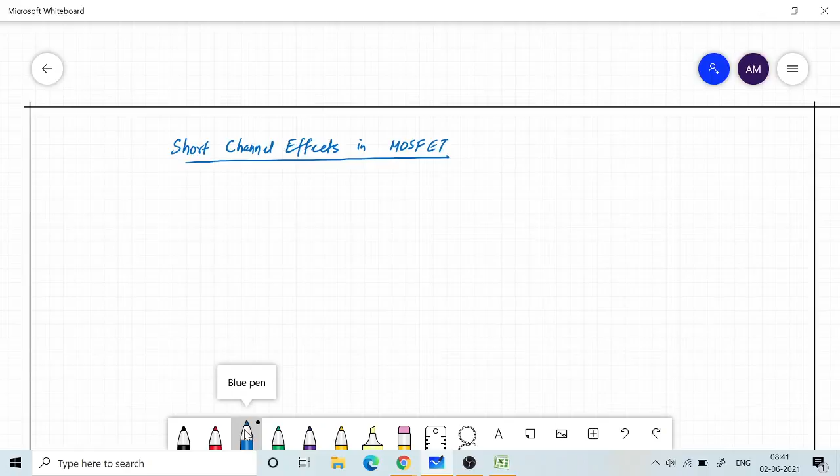So when we reduce this channel length, there are various consequences, and that is what we are going to look at. Number one, which we have already seen, is channel length modulation, that we saw in the last class. Channel length modulation. But for completeness sake, let me rewrite the expression for ID-SAT.

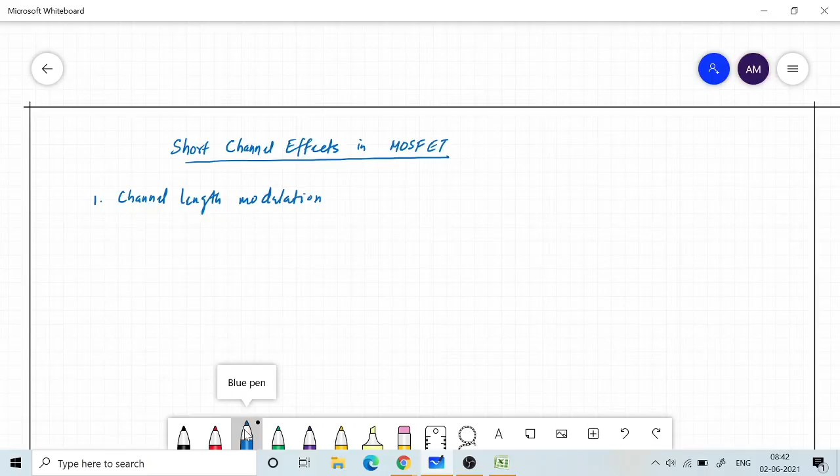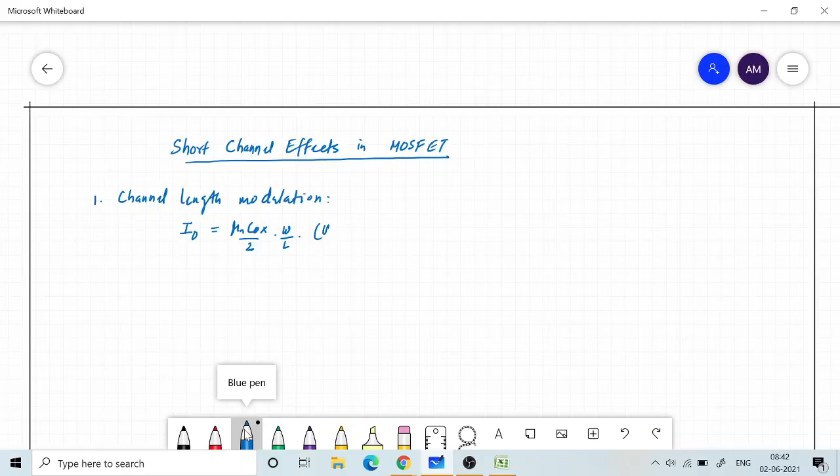Channel length modulation is more prevalent for larger values of VDS, and we have the drain current expression: ID is equal to mu n Cox, this is in saturation what I am writing, divided by 2, then W by L, times VGS minus VTH, whole square. And this was the original expression for the drain current that we derived, and then we corrected it to include what is called channel length modulation, and that term is basically 1 plus lambda VDS.

This means the saturation current also depends upon VDS. It's not completely independent of VDS. If it was completely independent of VDS, lambda would be 0. Once it saturates, there will be no more variation of the drain current. But practically what we see is that there will be small dependence, and this dependence will be more pronounced when we reduce the channel length, because we know that lambda, or lambda into VDS,

is basically delta L by L. It's a fractional change. So if L is smaller, then delta L by L is going to become more prominent. If L is very big, a small delta L change will not give rise to a larger change.

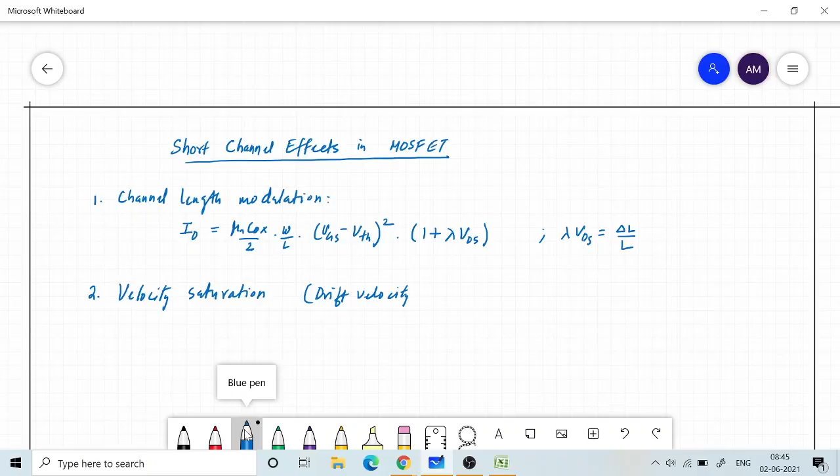Velocity saturation. Here by velocity I mean the drift velocity. Now in the derivation of MOSFET current we have used the concept of drift velocity. It was basically dx by dt, the rate of change of position of the electron with respect to time, and that depended on what? So drift velocity is given as,

so vd, that's the drift velocity, is given by the expression mu n, for electrons usually it is in the opposite direction, so minus mu n into E. So what does that mean?

The mu is a constant, so the drift velocity is going to increase in proportion to the electric field that you apply. This is always the case. Whenever a current flows through the conductor, there will be a flow of charge carriers, and the speed with which these carriers move is basically an average speed.

Drift velocity is basically giving you an average speed. If there is no collision, this charge will get accelerated in the field, and the velocity is no longer going to be constant. It will keep on increasing, like F equals ma. If you apply Newton's law, a point particle with charge in an electric field is going to accelerate as long as the force is there.

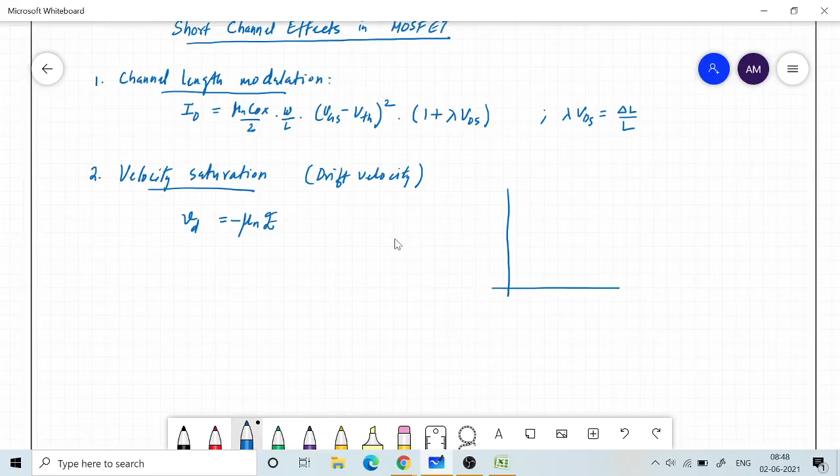So this drift velocity is proportional to electric field, usually. But as the electric field increases and increases, if I draw a graph plotting the electric field magnitude versus the drift velocity, as per this equation, it has to be a constant slope like this. As we increase the electric field, the drift velocity should also increase. But in practice, this linearity will not continue beyond a certain value of electric field.

So there is a particular value of electric field, we can call it some kind of critical field, beyond which it will not increase as expected. There will be a saturation, and the value or magnitude of the drift velocity saturates at some point. Beyond EC, if you increase the magnitude of electric field, the drift velocity will not increase. So this I will call VD sat, that means it's a small v, which is velocity, drift velocity, saturation value.

So this relation is not valid beyond this point. It is valid only for E less than EC. But for beyond EC, it is going to be VD sat. When E is greater than or equal to EC, it is going to be saturated, that means it remains constant. So this is what we mean by the phenomena of velocity saturation.

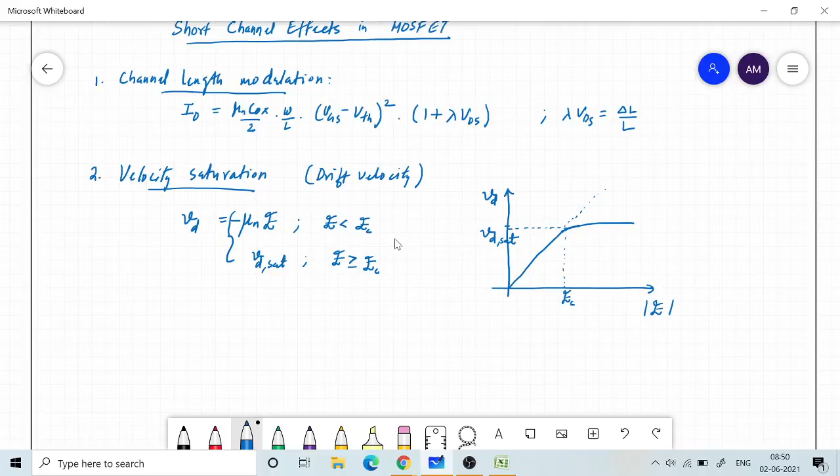Now what is the consequence of this in the case of a MOSFET? MOSFET current is due to the flow of electrons. If we are considering an N MOSFET, the flow of electrons results in the drain current, and we have derived the expression for when VDS is less than VGS minus VTH, that means it's working before saturation, then our IDS was what?

It was mu n C ox W by L, VDS into VGS minus VTH minus VDS by 2. So this was our expression. You can take VDS inside and then it will be VGS minus VTH into VDS minus VDS square by 2. That is another way of writing it. But whatever it be, this was the expression that we derived for the current before saturation is reached.

And if you want to include the effect of channel length modulation, you can also multiply it with this factor, though it is not very significant for smaller values of VDS, but still you can put it in. The effect contributed by the last bracket may be very negligible for smaller values of VDS, this may be closer to 1. So this was our expression for the linear region or quadratic region, and this expression is valid.

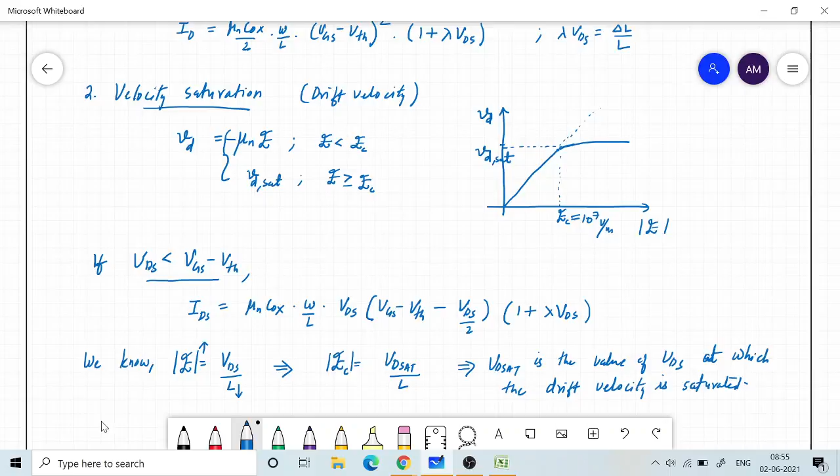And suppose this electric field, just as an example, is equal to 10 raised to 7 volts per meter, if EC is that, then for a 100 nanometer length MOSFET, when you apply 1 volt, you will reach saturation, beyond which the speed will not increase. So what is the consequence of the current? The current will be saturated.

So therefore the ID SAT, the drain current due to velocity saturation, is going to be mu n C ox W by L, VD SAT. I am replacing VDS with VD SAT. What is VD SAT? The value of VDS at which drift velocity is going to be saturated.

So if you apply even larger VDS, there is going to be no change in the current, because the speed of the electron is no longer going to increase. So it will be the same whenever VDS is going to be larger than VD SAT.

Okay, so it is going to be VGS minus VTH minus VD SAT again by 2, into, but in this expression it will still be lambda VDS. Because this is actually coming from delta L by L, which is equal to lambda VDS.

Okay, so that is not related to VD SAT. The extension of the depletion region width, which we learned in the last class, depends upon the actual value of VDS. It is not going to depend upon the VD SAT.

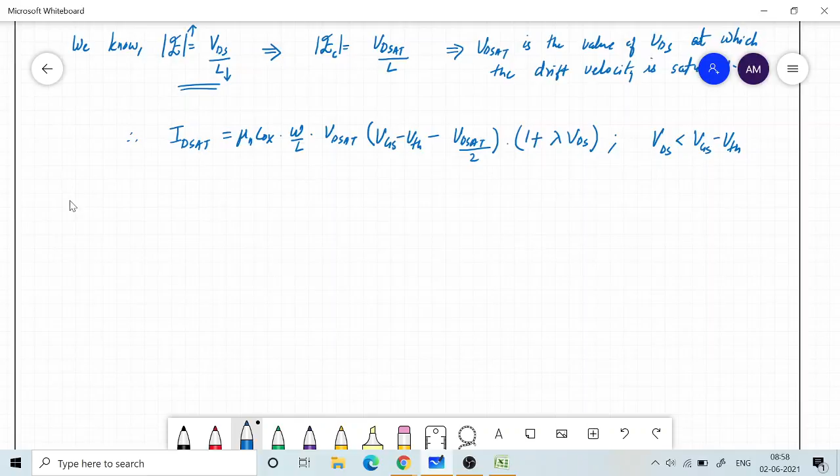So let's draw it and see how it looks. I am drawing VDS here, and this is my ID. Let's take two different cases. One case you have a very small VGS value, and if you have a small VGS value, it will saturate like this. So this is going to be the point at which it is going to saturate. Before that it is this, and we can write it basically as VGS minus VTH.

VGS1. So this curve corresponds to some VGS, which I call VGS1, which is a smaller VGS.

So it saturates, suppose my VD sat is here. This is where my velocity is going to get saturated, and it corresponds to some voltage. So for this VGS1, saturation has already happened even before VDS reached VD sat. So VD sat is not playing any role here, because VGS1 minus VTH is the point at which saturation happens, and when VDS crossed there, saturation already happened.

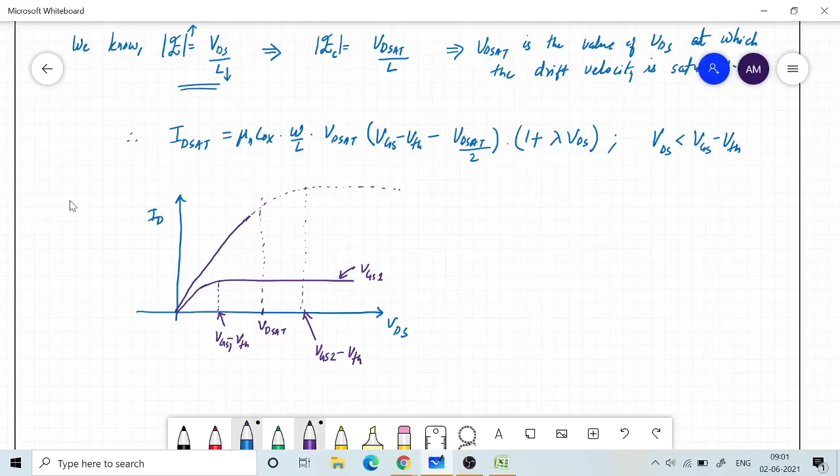And what is this point? This is the point where VDS equals VGS2 minus VTH. Note VGS2 is much greater than VGS1, as you can see the difference here. So the saturation should happen from here onwards, but then there is a VD sat.

Before VDS becomes equal to VGS2 minus VTH, there is a point at which VDS becomes equal to VD sat, and once you reach there, the velocity saturates, and therefore the current already saturates here. So this is the way in which saturation is going to happen. It cannot increase, it will be saturated.

Let me draw it more properly. So instead of saturating at this later point, it has saturated early, because your VD sat was here. At this point, when you applied VD sat, your electric field reached the critical electric field, and therefore your drift velocity saturated. Once the drift velocity is saturated, you cannot have any further increase in current with respect to VDS. That is why we are using this expression.

Now we have a new expression for current, taking into account the velocity saturation phenomenon. Earlier we had two expressions, one corresponding to the saturation current, the other corresponding to the drain current before saturation. Now, in addition, we have another current. So we need to combine all of this into one equation for ease of writing.

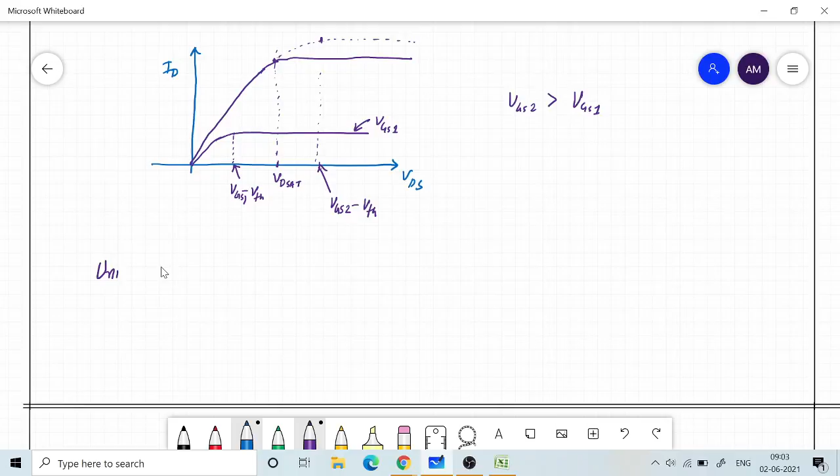So we have what is called a unified current model. This means that the ID current is going to be written as one equation, valid for all values of VDS. So we don't need to write separate equations for velocity saturation, the normal saturation when VDS becomes greater than VGS minus VTH, and when VGS minus VTH is smaller than VD sat.

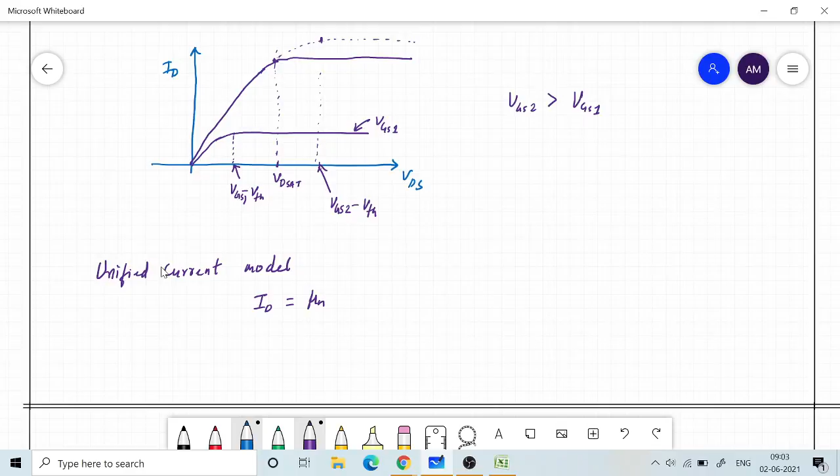So there are basically three ranges. If I consider the top curve, there is a range between this, then a range here, and a range here. Depending upon whether your VD sat is after VGS minus VTH or before that, you have to pick up the right equation.

So instead of writing different equations for different conditions, let's try to combine all this into one equation. It's basically given as mu n C ox, and then W by L. I'm going to write it in a slightly different way: I'll write Kn dash, so that I can introduce that also.

Kn dash, W by L, and then V min — I'll explain. V min into VGS minus VTH into V min, minus V min by 2, multiplying 1 plus lambda VDS. So this is my unified current equation, where I need to now define what V min is.

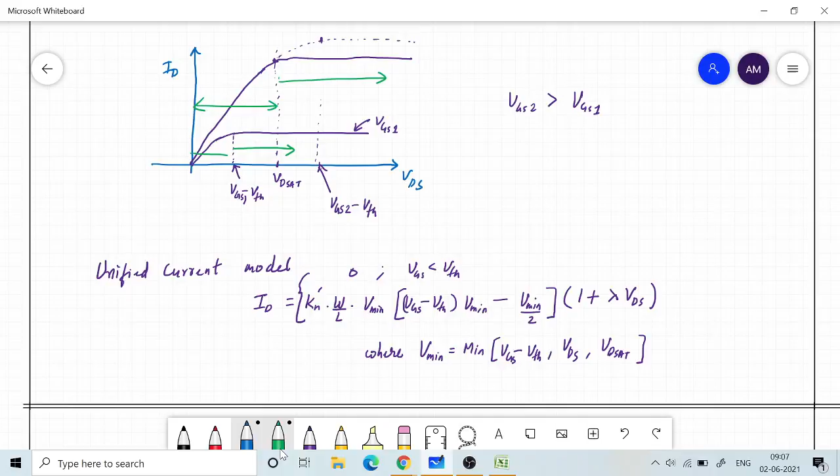So depending upon the value, here we have a different equation, similarly here we have a separate equation. So different curves here will have different expressions.

So for the bottom curve, for VGS1, we need to consider VDS, this one and this one. This is for the bottom curve, but for the top curve, we need to consider VDS, this and this. So these are for VGS2, and this one is for VGS1, whatever I have ticked.

So whatever is relevant will be taken according to the minimum of these three. That will be put in the expression as V min, and now I also need to explain what is Kn dash, which I did not introduce earlier.

So Kn dash, as you can see by comparing with the earlier equation, is basically mu n C ox. And what is C ox? C ox is basically epsilon ox, that means the permittivity of oxide, divided by T ox, and we consider it as one parameter, and this is also one of the SPICE directives.

I asked you to put say Kn and Kp correspondingly for PMOSFET, so you can put in the values, and this is generally a process parameter, or you can say the technology parameter.

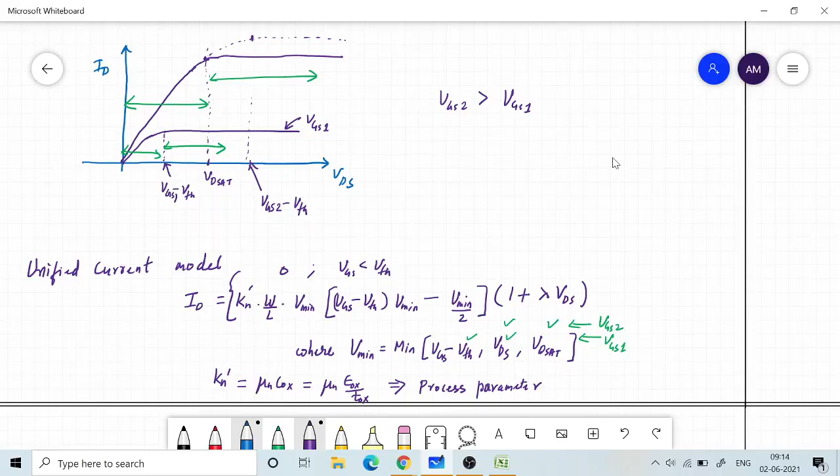So this is basically our second short channel effect. And what is it? It's called velocity saturation. Saturation can happen in two different ways. One way is that VDS becomes greater than VGS minus VTH, meaning pinch off happens - saturation due to pinch off. The other is saturation due to velocity saturation, which is because your electric field has become very large, reaching the critical field where the drift velocity can no longer increase further.

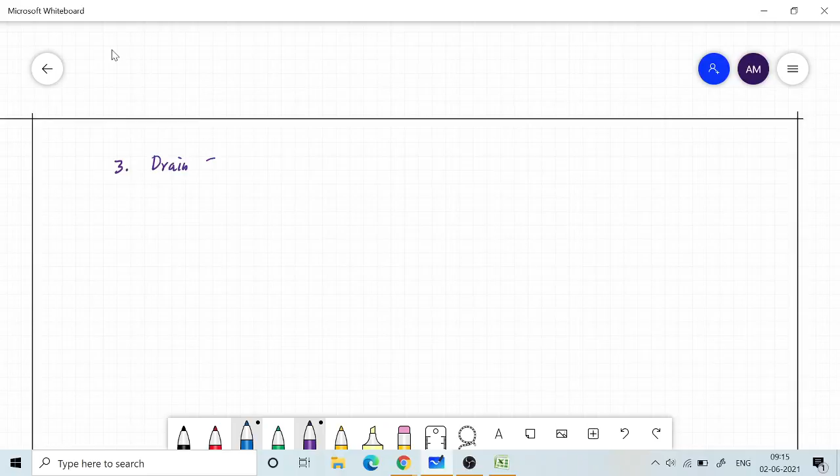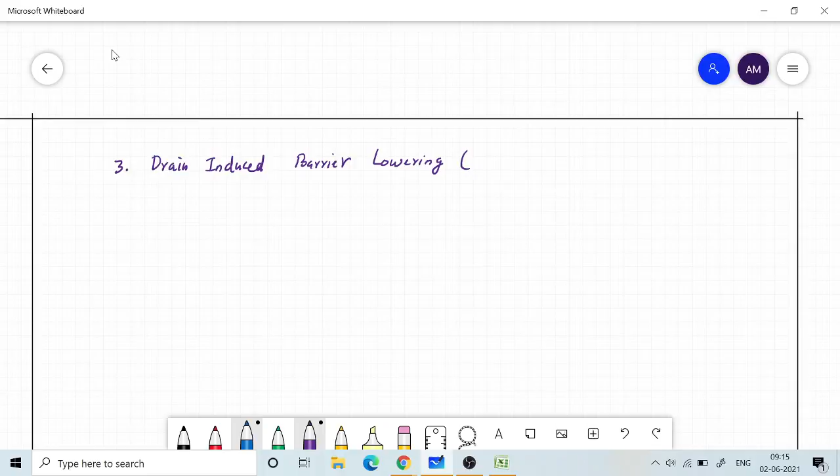Next we'll go to the third short channel effect, and the third short channel effect is called drain induced barrier lowering, and people in the VLSI field will refer to it as DIBL. It's just the short form of drain induced barrier lowering. So when you hear DIBL, you know they are talking about drain induced barrier lowering.

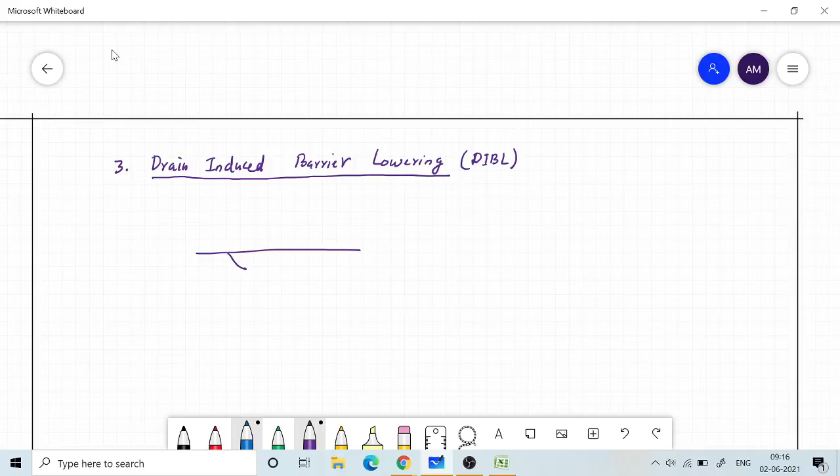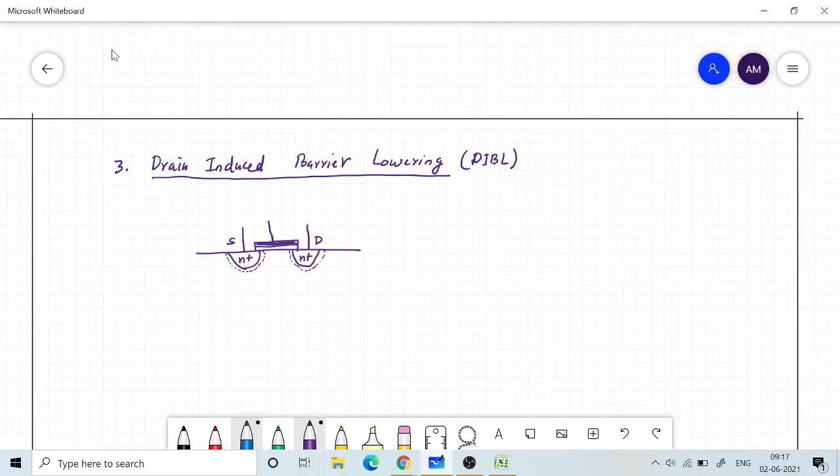What is it? To understand this, we need to draw some schematics. If you go back into the schematics, there's an N plus region here, and this is also one of the short channel effects. I'll draw it such that you see the channel length is very small, and there will be a depletion region extending on both sides - this is source, this is drain, and then you have oxide and metal, which I'll draw shaded as the gate. When there is no voltage applied, there is a depletion region extending into the P substrate. This is an N channel MOSFET, and as you apply VGS and VDS, we know what happens.

VGS will decide whether an inversion layer is created, and VDS will increase the depletion region width. As you increase VDS, it's like reverse biasing a junction, and the depletion region is further increased - this is how it will look. Now if VDS is large and the depletion region width is increasing, it will mainly increase into the P substrate region, not into the N plus region much, because N plus has about 2 orders of magnitude higher doping there. Wherever the doping concentration is less is where the depletion region extends, and this will effectively reduce the length of the channel.

This reduction is very significant for low length, or smaller length, MOSFETs. Earlier it was like this, and it has almost become half. So to invert this channel, if you apply the gate voltage, you don't need to apply the same amount of threshold voltage as before, because you don't need to invert the entire region from source to drain - you only need to invert this smaller region. If you want to invert a smaller region, you require only a smaller amount of electrons coming up there, and in a way you can say your threshold voltage will be reduced by it.

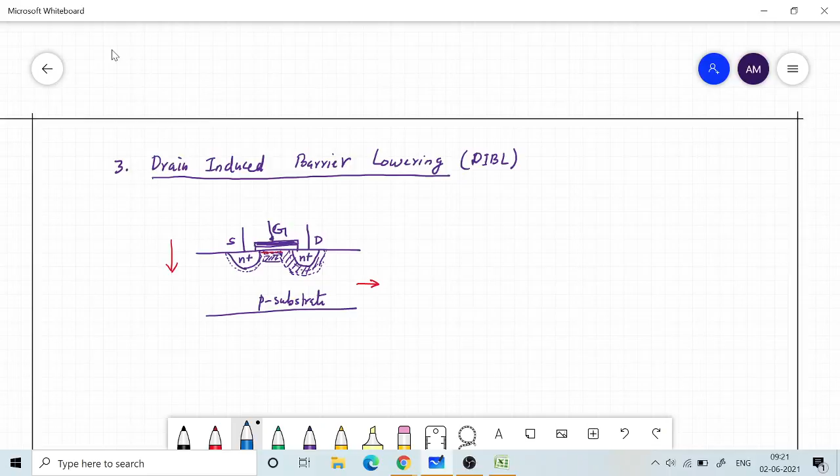So if you go from left to right, you have an N plus region. Okay, so there is an N plus region, then there is a P region, and then there is an N plus region. Now the first thing to draw is the case where VDS is 0. Okay, so VDS is 0, your Fermi level is going to be continuous. Means when there is no voltage applied, your EF is going to be the same. Now N plus means the Fermi level is going to be very close to the...

So this is our Fermi level, and it is going to be very close in the N plus region. It is going to be very close to the EC, right? Then this is my EC. So EC is going to be very near - so this is EC on the N plus region, whereas the Fermi level is going to be more near to the EV. So this is my EV in the P substrate, and then I will have EI and I will have EC.

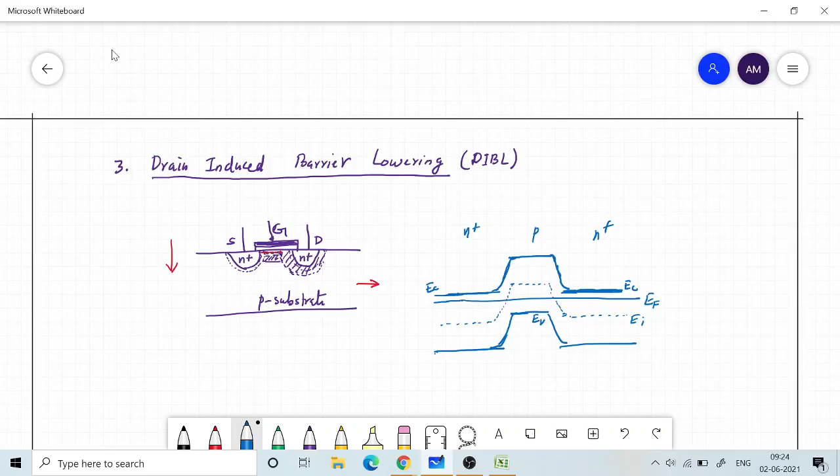Okay, so now I can join it. So this is the depletion region 1, that is source to bulk, or source to the semiconductor, N plus to P, and then back from like this. And this is my intrinsic level, how it is changing, and then finally it will look like this. Okay, so roughly it is like this. So this is my EV in the N plus region, this is also EV in the source region, so this is the drain region, and this is how it will look like when we do not apply any VDS.

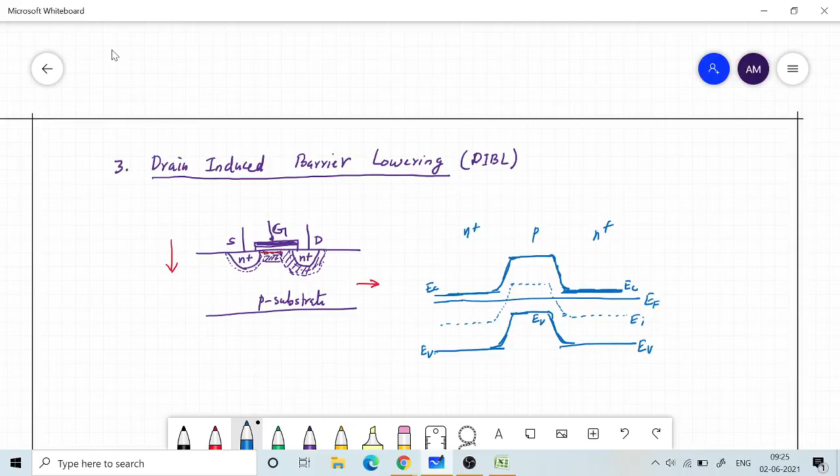Okay, the moment we form this N plus region on the P substrate, it will look like this. Okay, so you can see that this N plus region, its majority carriers are electrons, because your Fermi level is close to the conduction band. Okay, and here the Fermi level is close to the valence band, so it is P type. Again, on the drain side also, because of the N plus region, the Fermi level is close to the conduction band.

Okay, now on top of this, if I apply the potential, I said earlier the depletion region width will increase. So how can you show that? Okay, in order to do that, let me redraw the energy band diagram.

In the case when you apply VDS, what is the consequence? One thing you know is that this Fermi level cannot be continuous. It will be shifted between the two regions by an amount equal to the applied voltage.

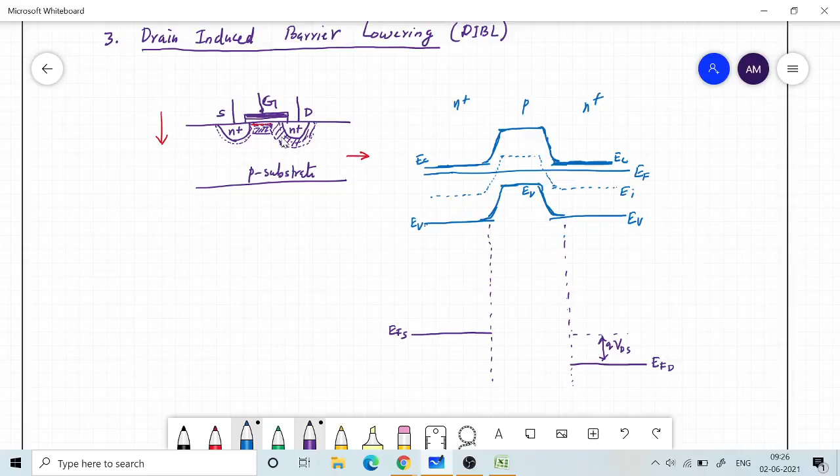If you apply a positive voltage on the drain, since we are drawing the electron energy band diagram, your EF is going to go down. So this is EF on the drain side, and it will go down corresponding to the EF on the source side. This difference is basically Q into the voltage VDS. So if you apply positive voltage, it will go down on the drain side, because Q is negative for electron.

What about the other regions? They are still N plus, P, and N plus. So if you redraw, your EC is still here, your EC is going to be here. So this is your EC on the drain side, EV on the drain side, and then somewhere in the middle you have your EI of the drain side.

Similarly, this is your EC on the source side, and this is your EV on the source side. Somewhere in the middle you will have your EI on the source side.

Now what is more important is to draw how it looks in the middle. As before, on the source side there will be no much change, it just goes up as before. But then on this side, the depletion region is going to extend. Earlier the depletion region was on the right side, this much, and it was more or less the same as on the left side.

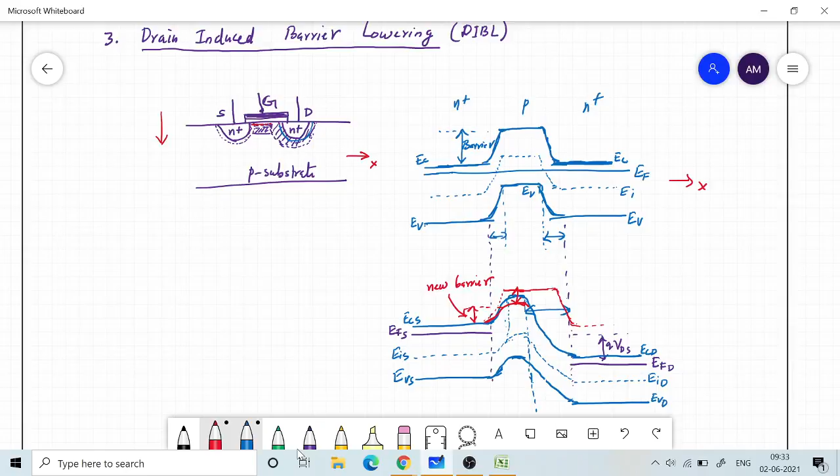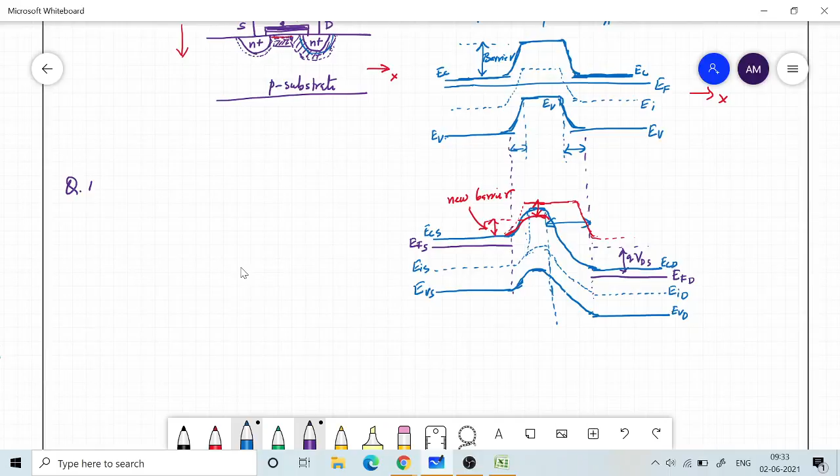So now the question is this: if this is what is happening, then what is going to be my threshold voltage? That is a question we need to answer. What is the new threshold voltage?

What was the earlier threshold voltage? We will denote that as VTH0. Let us write it as VTH. So earlier the threshold voltage was VTH0 plus—you remember this gamma we talked about in the last class, due to body biasing.

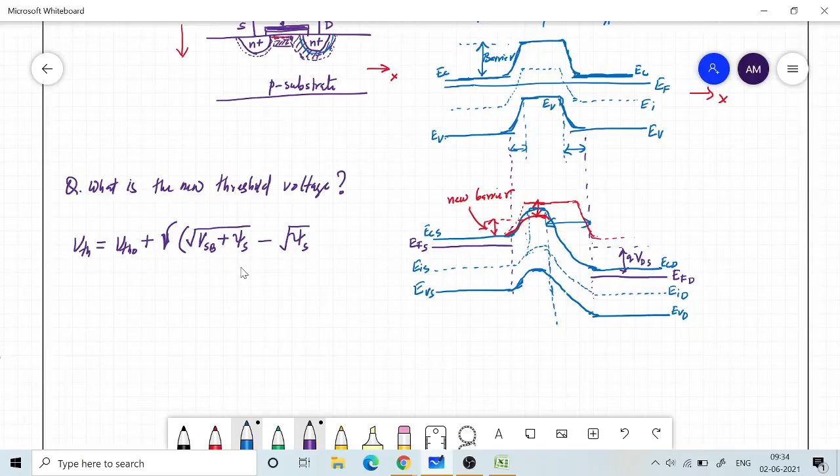There will be a correction. VTH0 is the threshold voltage without body biasing, but if there is body biasing, then we need to take that into account. So if there is a source voltage with respect to the bulk, we need to add that to your psi_s, and then subtract psi_s, where psi_s is 2*phi_b. This is what we have seen earlier.

Now this will be further modified because of DIBL, or drain induced barrier lowering. How much we need to modify this, we need to look at. In order to see that, we will do one thing: the consequence of drain induced barrier lowering upon the threshold voltage is actually found out by measurement.

We apply VDS at two different values. One is a small VDS value. Let's say VDD, that is the power supply voltage. In digital circuits we have a 0 voltage and VDD, corresponding to low and high states. So let VDD be the power supply high state voltage.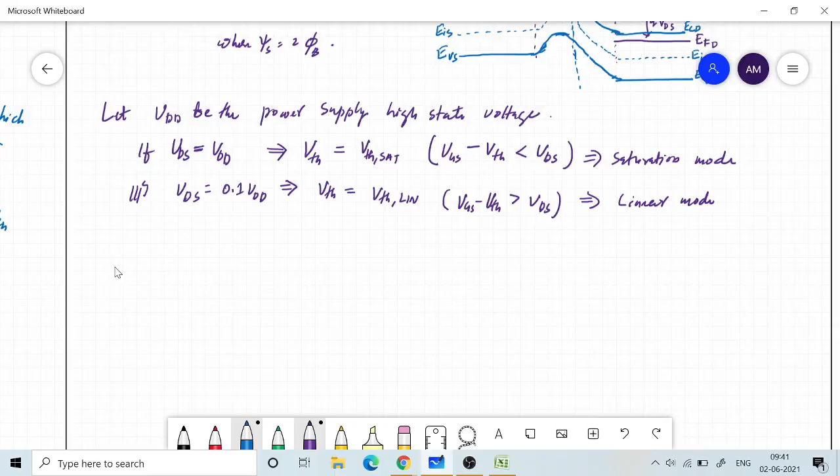Definitely when you apply large VDS, it should be smaller by the logic I said, because we only need to invert a smaller region due to the lowering of the barrier. In other words, from the energy barrier point of view, when you apply the gate voltage, you are basically pushing down this region.

All the bands here you are pushing down by applying VGS. So VGS will push everything down, because positive VGS means this region will be pushed down. Now if you want to push it further such that electrons can easily flow from one side to the other, so that this region will also become n-type, you push further keeping EF constant. You can push it down by only applying VGS and make it n-type, and thereby invert the channel.

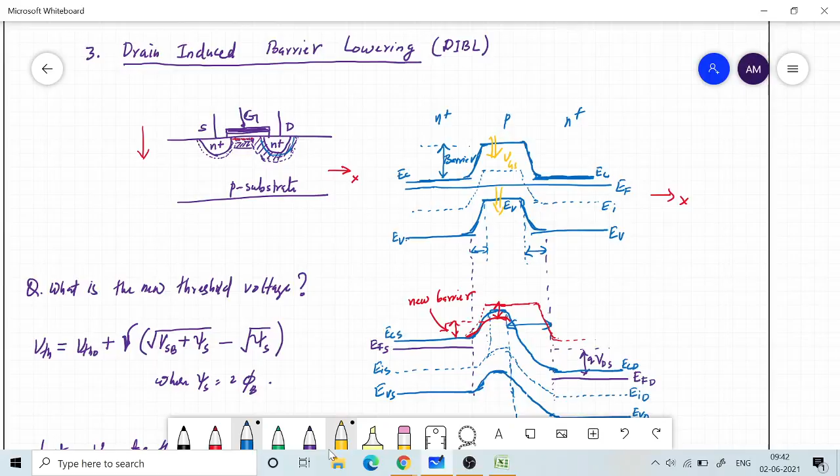So that is basically the way in which the threshold voltage is defined: how much you need to push it down such that it will become an n-type material in the middle region. So if it has to be made n-type material, how much do we need to push? How much voltage do you need to apply in order to achieve that?

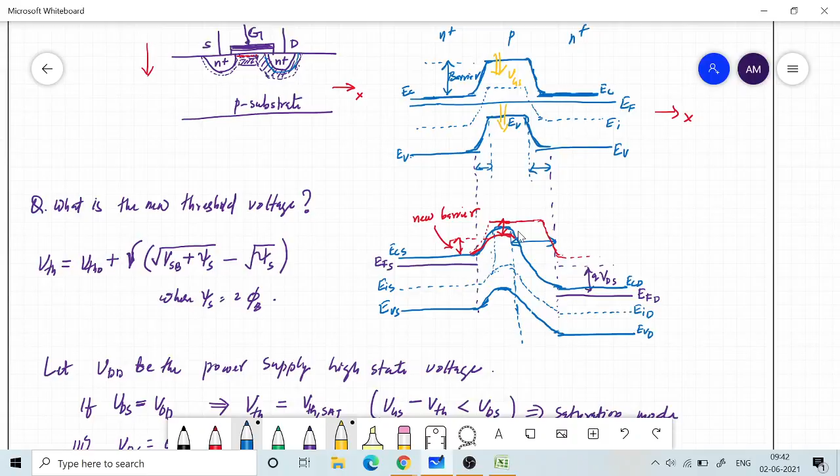But if already the barrier has gone down, we don't need to push that much as before. We only need to push a little bit more. The present new barrier, that much only we need to push down in order to make it n-type. So our VTH will reduce when we have a large value of VDS.

So we will define a parameter, the DIBL parameter. Therefore, the DIBL parameter you will define as, say, eta. So that is going to be equal to...

VTH linear, this is going to be larger, minus VTH saturation, this is going to be smaller, because we don't need to push down much since the barrier is reduced, divided by the difference in the VDS values. So VDD minus, say in this case we have taken 0.1 VDD. Whatever VDD you take, you can say that is a very small VDD.

Okay, so this is a parameter that we will find out by experiment. So what is the experiment you need to do? After fabricating the device, you apply VDS equal to VDD, find the characteristics, and find out the threshold voltage.

So that is one threshold. Then we apply smaller VDS and again repeat and measure the threshold voltage again. So they will be different by some amount. If they are the same, then DIBL effect is not there. If they are different, definitely there is barrier lowering. That's what we mean by that.

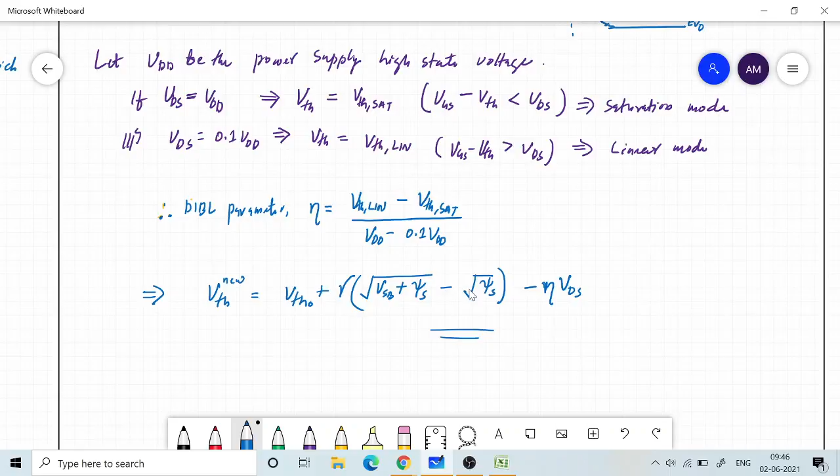So this is also a short channel effect, because for long channel, basically the width or the length of this region, this is our length, right? Length of the channel.

So this will be very far away, and thereby some fraction of this same amount of depletion region encroachment will not make much effect if L is very large and this is only like 1/100th of the length. But if it is like 1/10th or 1/5th of the entire length, this is going to be very significant.

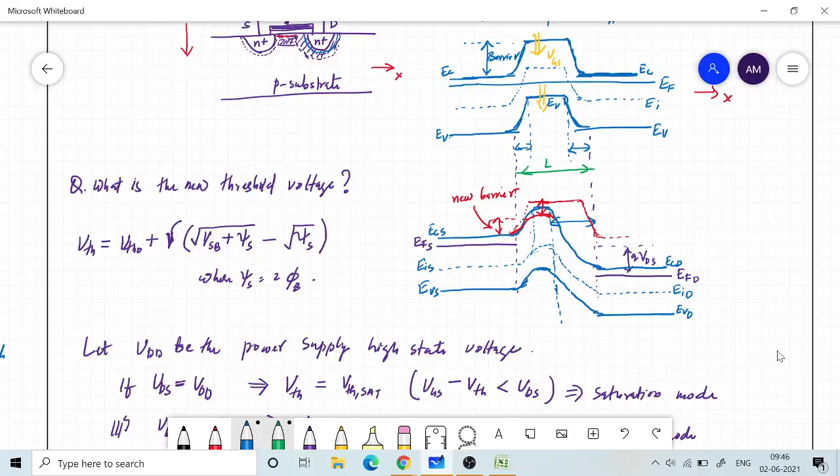Now how do we overcome this phenomena, because it is not a good thing to have this effect? We need to do something to avoid it. So to overcome DIBL effect, we can introduce a certain change. What is the change? We can introduce a P plus region near the N plus region. The idea is to reduce the length by which the depletion region extends into the channel region.

If it is a P plus material, so if you have a PN junction, you have N plus region here, earlier it was P region here. If you think of it as a diode and you are reverse biasing it like this, then since it is N plus, the depletion region will be much less extended into the N plus region, but it will extend a lot more into the P region, because in the P region the carriers are very scarcely populated. The density is very less, whereas here you have very, very high density. So everything can be obtained with a smaller length.

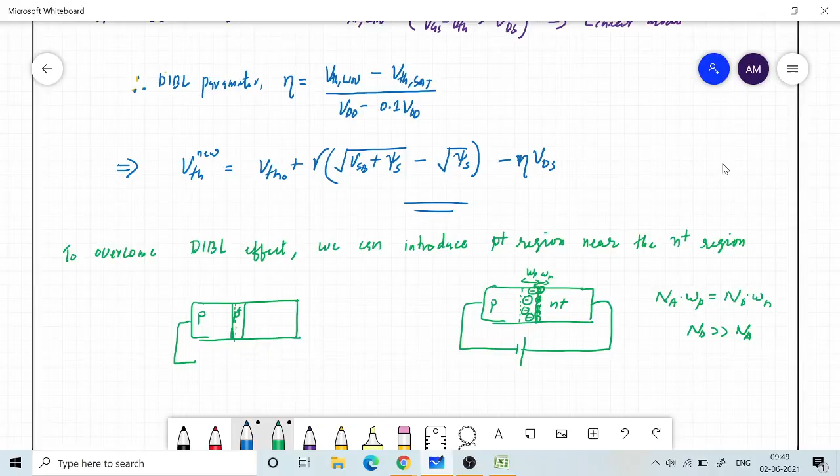So to overcome this effect, this is our P side, but near to it we will introduce a third region, which is basically P plus region. So it is a P plus and N plus region. And if you now reverse bias by the same amount, the picture will be much different. There is going to be a depletion region here, but it will be very, very small, and this side also it will be very, very small.

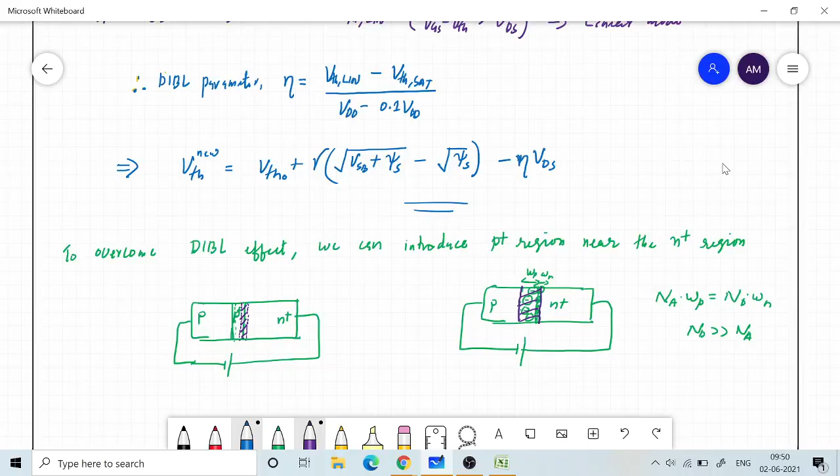So thereby the depletion region is only extending this much. It will not extend because we are introducing a P plus region there, whereas here the depletion region has extended so much. So by introducing a P plus region, we can reduce the depletion region extension into the channel region. So the channel length is effectively not much affected by it, and therefore the barrier will also not be reduced.

Thus the barrier reduction is reduced as the extension of the depletion region into the channel is now minimized.

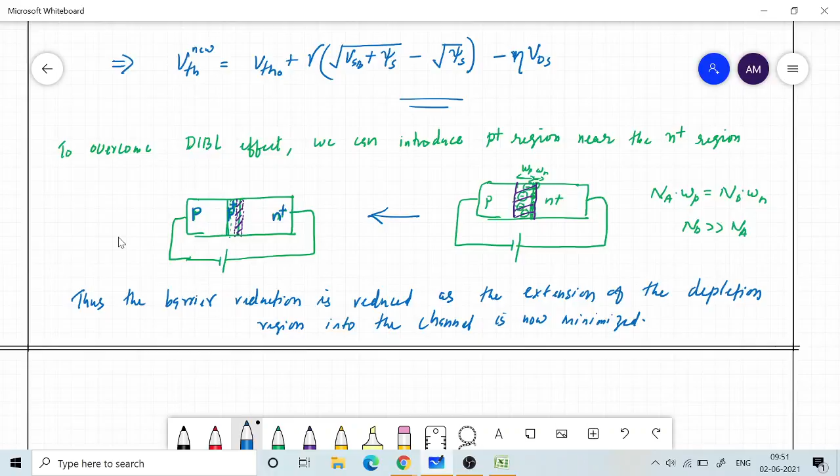So we are proposing this: introduce a P plus region. So P is there, P plus is there, and N plus is there. Earlier it was only P and N plus. This is done on both sides, both source and drain side, in order to keep the device symmetric. I told you in an earlier class that you can use any of the terminals as drain or source, because MOSFET is constructed as a symmetric device.

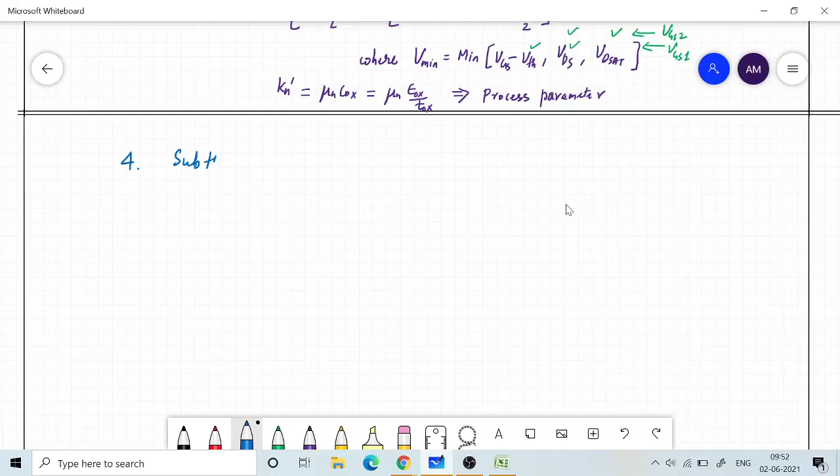So that is about the other effect, that is DIBL effect. Now let's go to the next effect, the fourth short channel effect. This is called sub-threshold leakage.

Now, by the term sub-threshold, you should immediately understand that VGS is less than VTH. Or to be more precise, VGS is between VTH and 0. So what is going to happen if we keep VGS less than VTH but greater than 0? Sub means smaller than threshold, just like we say sub-micrometer, meaning lengths smaller than 1 micrometer, like say 100 nanometer. So here sub-threshold means VGS is less than VTH.

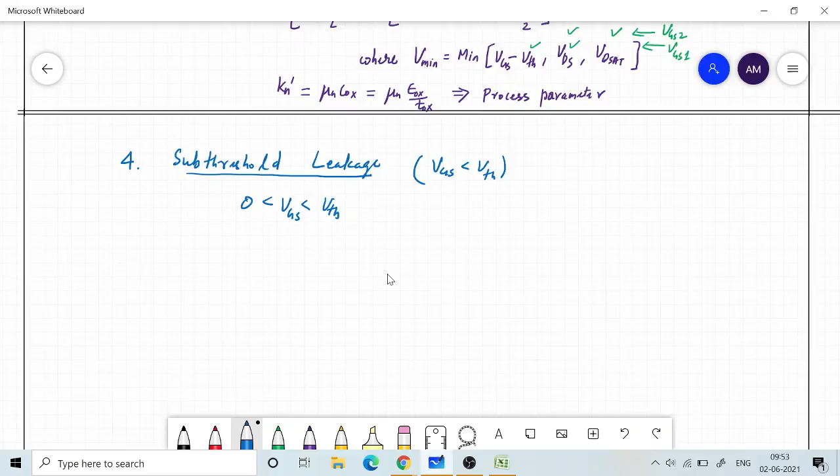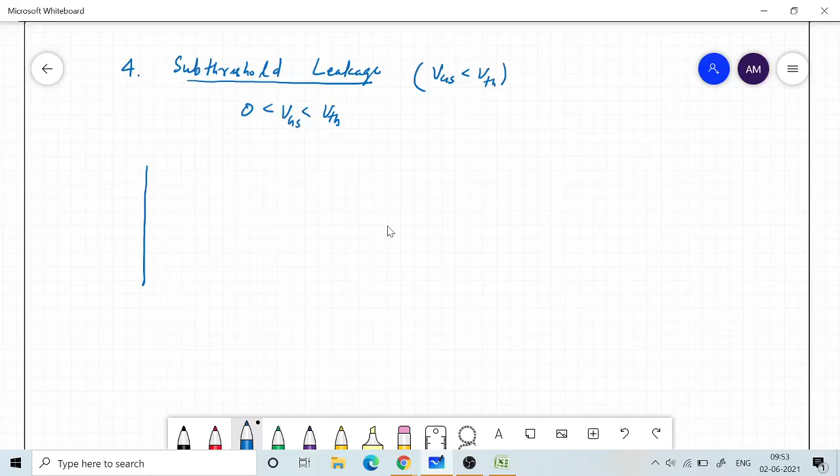So what is going to happen if this is the case? We need to look at the picture inside the device. So we know that if you simply draw the transfer characteristics, we did that earlier, that is VGS versus ID, and by using the SPICE directive, we have been able to fix our threshold voltage.

So threshold voltage is somewhere here, say 0.8 or something like that, and this is in microampere. We are looking at this drain current. So we got an expression something which looked like this.

Now in our case we kept the device in saturation, and therefore we got a curve which looks like a parabola. This is because when we did the experiment, we kept our VDS equal to VGS. So as you increased VGS, you also increased VDS.

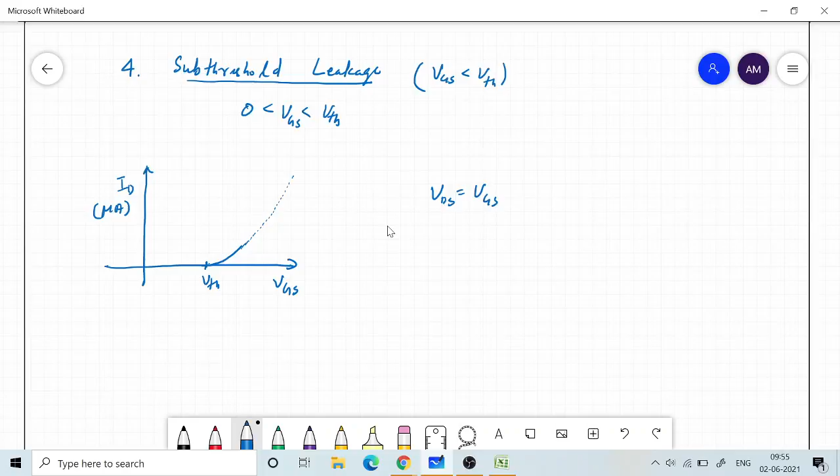Alternatively, if we do it this way, we get a parabola because we ensure the device is functioning in the saturation region, and therefore current ID is basically mu n Cox W by L, divided by 2, into VGS minus VTH the whole square. So this is what we will get, neglecting all the short channel effects.

But if VDS was kept constant, using a second power supply with a fixed voltage, say 3 volts, and you varied VGS from 0 to say 5 volts, initially the device is in saturation mode and traces this parabola path. Then after some time, VGS is increased such that VGS minus VTH becomes larger than VDS.

For example, if VDS is 3 volts and VTH is 0.8 volt, when VGS is equal to 3.8 volt or greater, VGS minus VTH is going to be larger than VDS. This means linear region.

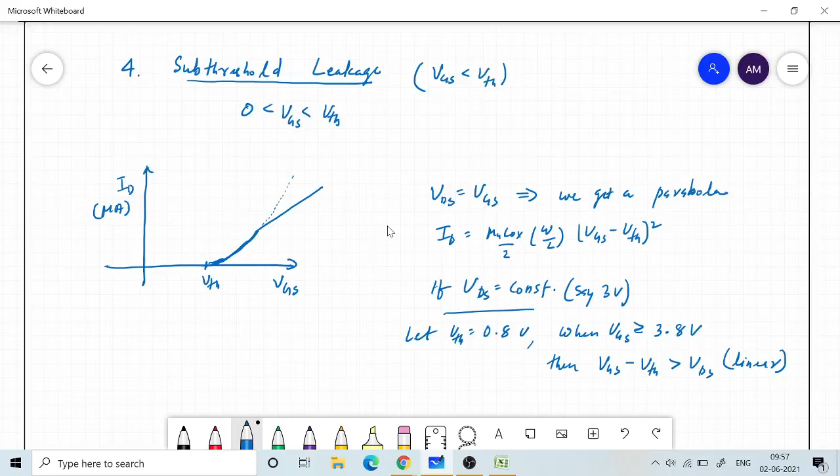And if it is linear region, the current is not going to be a parabola like this. It is going to look like a straight line. So this is the way you will get the characteristics.

You have not done this, but you can check it: if you keep VDS constant, at some value of VGS, say 3.8 volt, which is basically VDS plus VTH, you will have a change in the shape of the characteristics. From being a parabolic relationship, it will turn to a linear relationship, because it goes from the saturation current equation to the linear equation. It may be a smooth, gradual transition rather than abrupt, but still there will be a variation you can observe when you do the experiment.

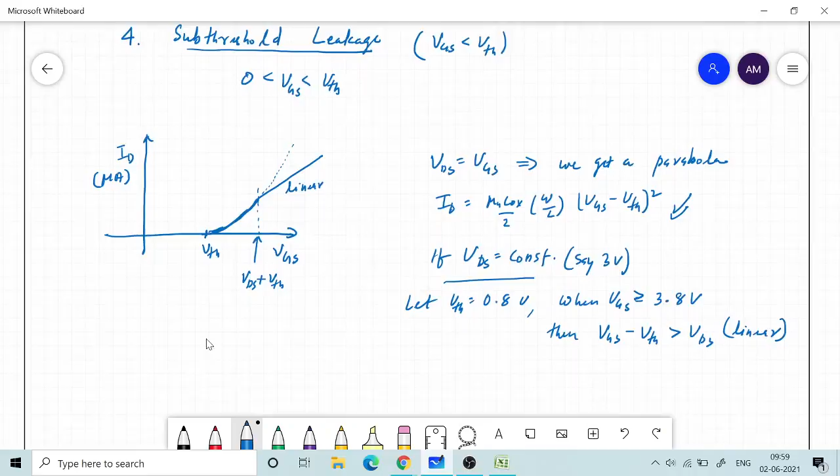So the point is that if you plot the characteristics on a linear scale - here I have taken a linear scale - the current is plotted in linear scale, and you have an option to do logarithmic scale also.

Now if I draw the same characteristics not in a linear scale, but on a logarithmic scale, all I'm going to do is take a logarithmic sheet and plot the same thing. So this is again VGS on the x-axis, but now on the y-axis we plot log of ID, logarithm to the base 10. And what we see is going to be entirely different.

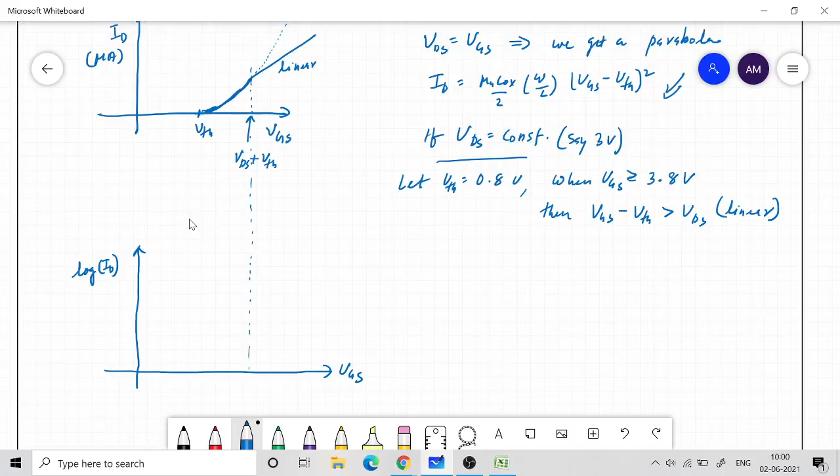If I look at this, these are some critical points: one is VTH, and the other is where it goes to linear. What you observe is a straight line here, and then it bends like a saturation curve, and then it further bends, maybe more gradually. So this is what we are going to see, and this is our VTH. The only difference is that I am using a logarithmic plot instead of the same characteristics.

Earlier it looked like zero current, but now you will see that it is no longer zero current, and you can even extend this further to the left. So this region, between 0 and VTH, is not having zero current - VTH may be 0.8, so from 0 to VTH, if you look, there is going to be current like this in the logarithmic scale.

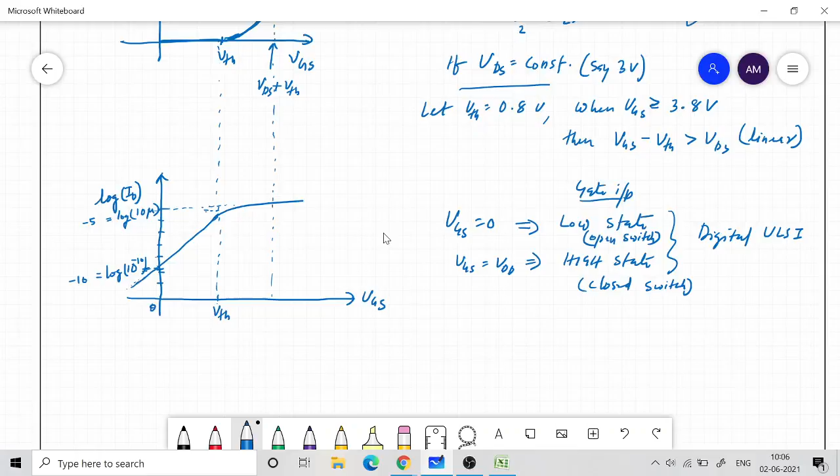It could be a different current also, maybe 1 milli also, but what is more interesting for us right now, in sub-threshold operation, that is when VGS is equal to 0, we don't have a zero current, we have a finite current which is just 5 orders of magnitude smaller than the actual current. So that current is what we call sub-threshold leakage current. So point number 4 is basically sub-threshold leakage.

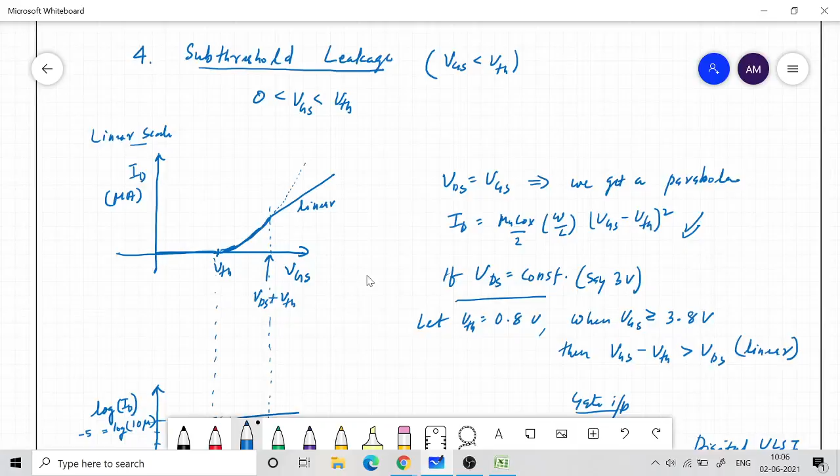So what is sub-threshold leakage current? Sub-threshold leakage current is the magnitude of drain current when VGS is equal to 0, and ideally this should be as small as possible, but practically this is never 0. So how small it can be, that is what we are interested in looking at.

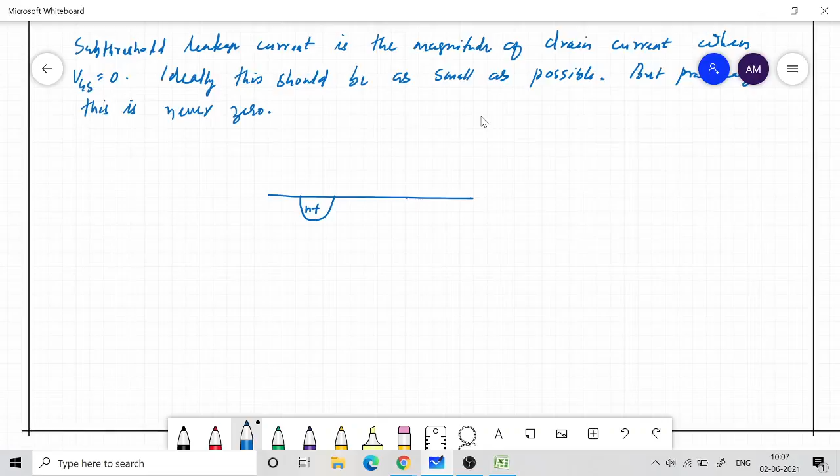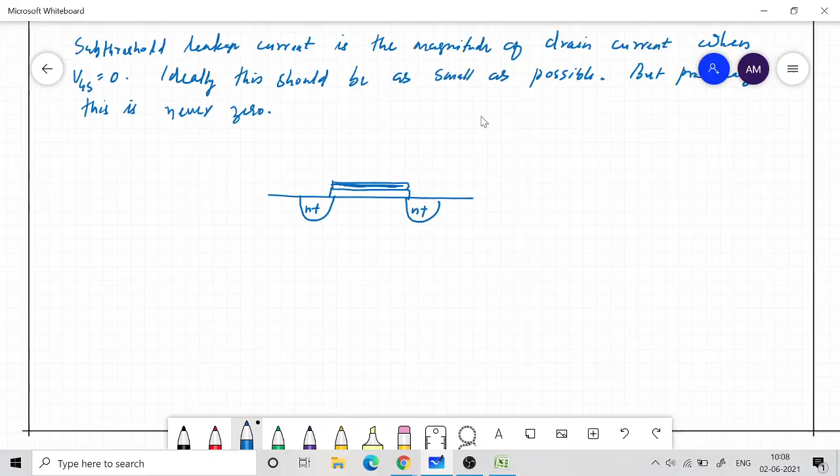So in order to find that out, we need to go into the details of sub-threshold operation. Let me again draw the schematic. So you have n plus here, another n plus here, and we are looking at a case where we give the gate voltage small. So VGS less than VTH.

This is the situation we are considering, and if you look at the number of carriers inside, they are not much, right? It's not going to be much, it's going to be very, very small. Only when you reach VTH, it's going to be significant. But less than VTH, the concentration of these electrons - the inversion layer has not been created. So there is a weak inversion, probably you can say. So that will have some effect.

So this is basically the point x equal to 0, and this is basically x equal to L. So if you look at the concentration of electrons, we need to apply a VDS also here, then only the current can flow. So we are going to look at the case where VDS is there, and the device is supposed to be off when VGS is less than VTH, but it is not really off. That's what we are saying.

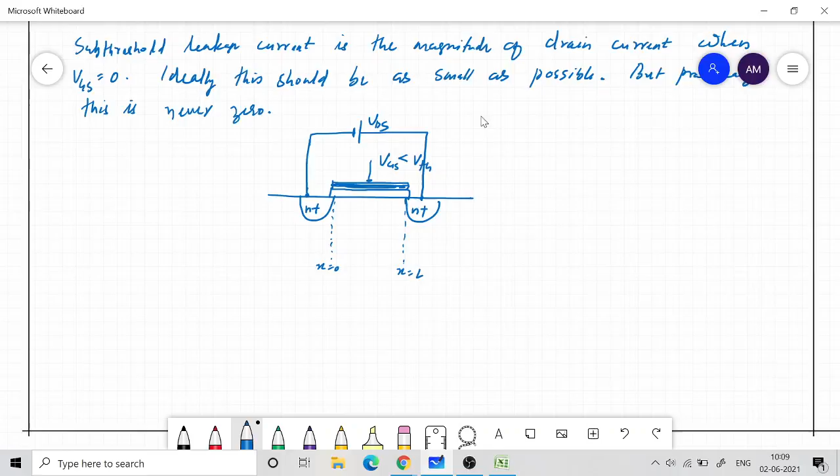There is some current which is still flowing even when strong inversion is not happening. So when we operate in the sub-threshold region, in order to see that, we need to look at

the variation of the concentration from 0 to L. Okay, this is my x. So if you look at

if VDS is very large, there will be pinch off happening also, so you will have variation of the concentration like this. That is, this side we have large concentration, and then to that side it will go to 0, because wherever

the depletion region begins, you will have 0 concentration. That is why we call it the depletion region, so there is a depletion region here also, which I am not highlighting much because we are looking at another parameter here. So wherever the depletion region starts, you will have zero concentration, but there will be a concentration

on the source side relatively larger, and this concentration I will call the concentration of electrons in the p region as NP of 0, corresponding to x equal to 0, and then it reduces to 0. So here I can say that it is NP of L, which is 0. So you can see that there is a change in the concentration from left to right.

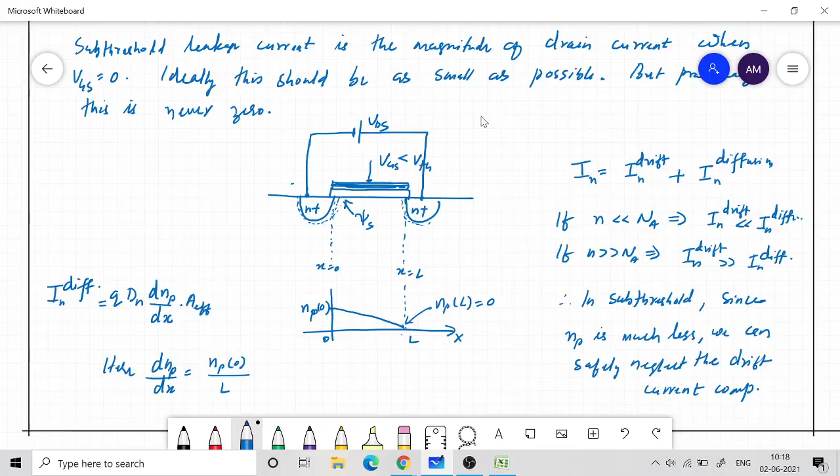The direction of current is from right to left, because VDS positive voltage is connected to the drain, and negative voltage is connected to the source. So this is the source and this is the drain, and the current is going to be in this direction. Let's work out the magnitude of this current. Electrons flow from left to right, but current is in the opposite direction because electrons are negative charge carriers. So we will substitute this back into the equation.

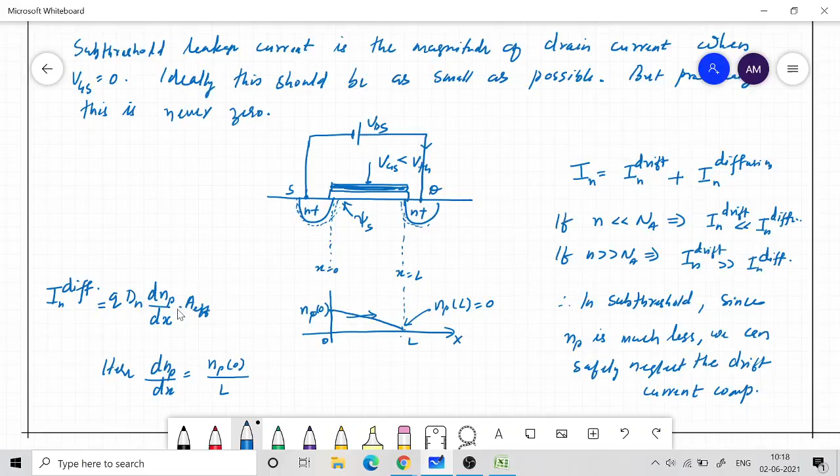So the diffusion current in subthreshold operation, that's what we are looking at, because we neglect the drift current since it is much smaller, as the absolute value of this carrier density is much smaller. So that is going to be equal to, I can denote it as ID sub for subthreshold.

So what is it? Q into Dn into, now I will substitute NP0 divided by L into effective area. Now what is effective area? When you look at the cross section of the channel, the layer of electrons has some depth which is basically W, and then some thickness of this electron distribution. We don't know exactly how much that area is, so it may be a better idea to talk about current density, but still if you want to find the current, you need to multiply that current density with the area of cross section.

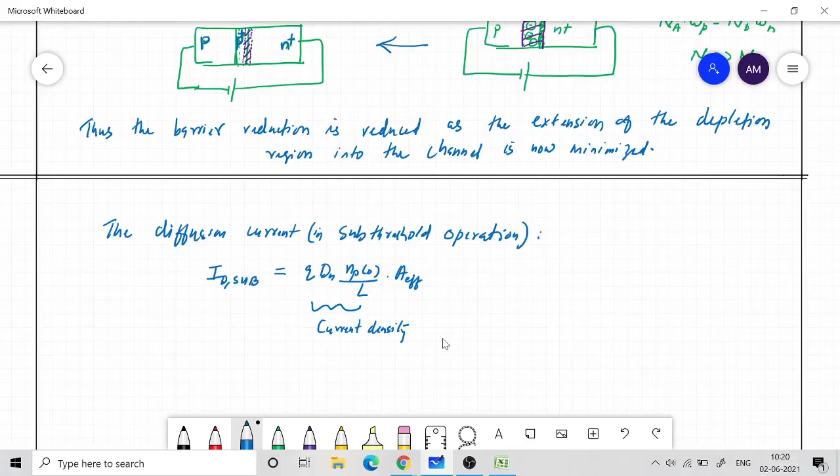So this is basically current density, which means current per unit area. Multiply it with the area of the cross section, and that will give you the current. So I can further write this as Q into Dn by L into effective area, and then what is NP of 0?

NP of 0, if you remember from our earlier discussion, is NP0 into e raised to psi s by Vt. This is an expression we have looked at earlier, called the law of junctions. Basically, when you raise the potential from the intrinsic concentration, which was Ni square by Na.

So this can also be written as Q into Dn into effective area into Ni square by L into Na, into e raised to psi s by Vt. All of these are constants, so I will call it I0, and write it as I0 into e raised to psi s by Vt. I hope you remember this formula.

So when the potential changes, far down in the bulk you have a potential which is 0, because we assume the body is connected to ground. But at the surface of the semiconductor oxide interface, we have a potential psi s. So by the change of voltage, how much is going to be the change in electron concentration? We have done this using this formula in the problems also — how much, say when you apply 100 millivolt psi s, how much is the change in the concentration of electrons, etc.

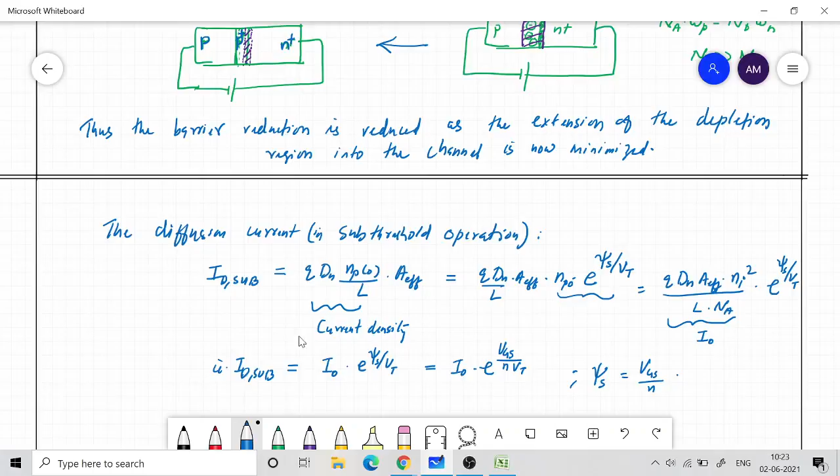So how do I write it? I can write psi s as VGS by some n Vt. So where I have defined psi s as VGS by n, in other words, where n is basically a quantity which is greater than or equal to 1. So let me specify that n is basically greater than or equal to 1.

So you are applying a VGS on the gate, then the channel potential or the surface potential, it should be called, is increased by some amount, but it can never be exactly equal to VGS. It will be lesser than VGS, because there will be drop across the oxide layer also. So remaining is going to be the potential on the surface. So n basically tells you how much fraction of the VGS is going to be coming in the surface.

Depending upon the way the oxide capacitor is made, you can make the surface potential maybe same as that of, or lesser than that of, your VGS applied. So if there is a good control of the surface potential with the VGS, then you can say the most ideal case is n equal to 1. So whatever voltage you give at the gate, that will immediately come at the surface of the semiconductor. So that's basically n.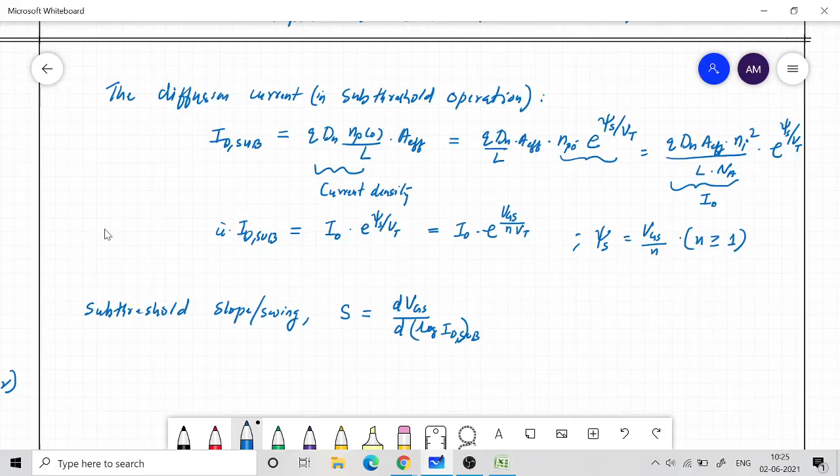It is defined as dVGS by d log of ID, the ID subthreshold. So this will be a parameter which will determine the slope of our subthreshold characteristics.

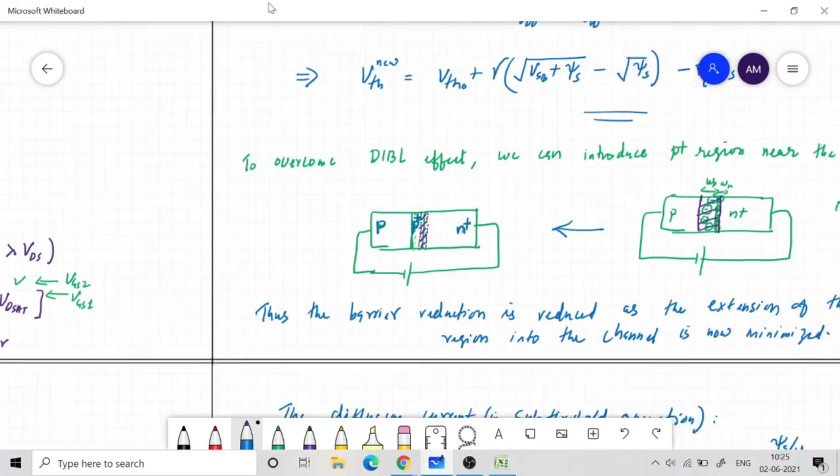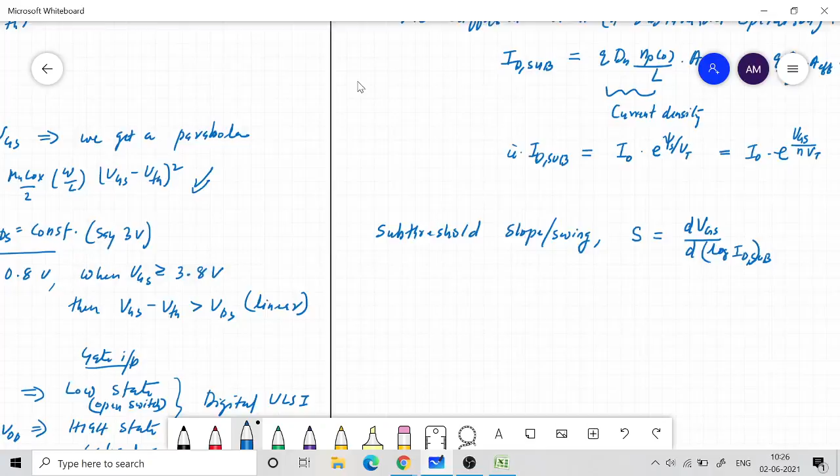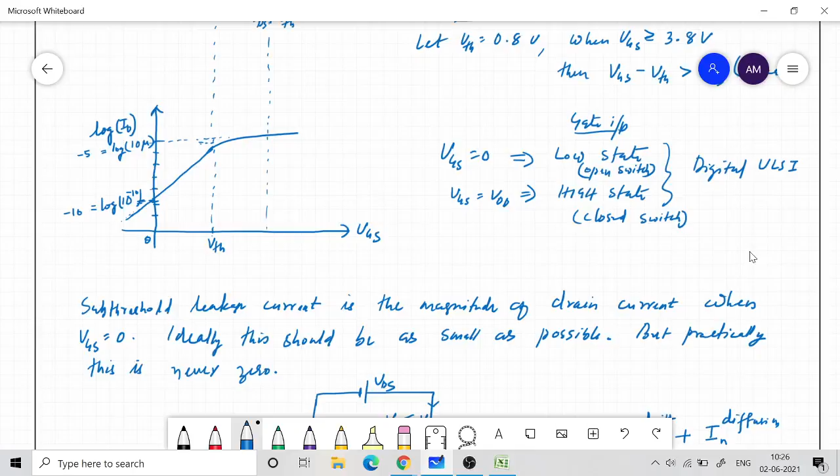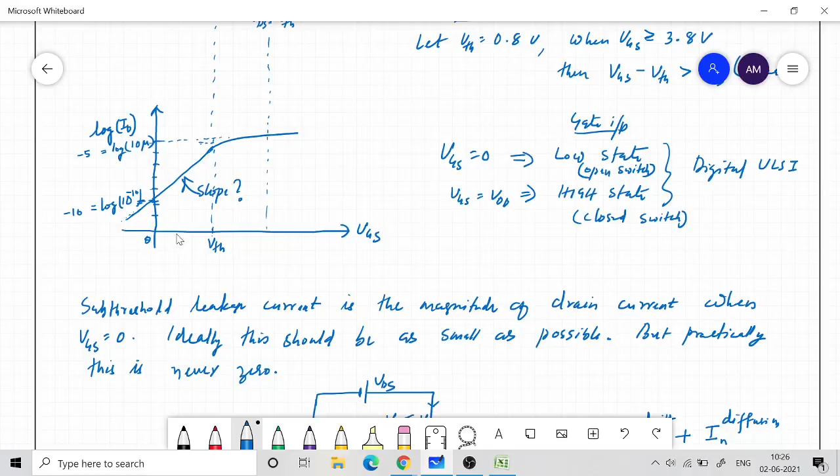Where is it? I think here. Sorry, where is it? Yeah, this one. This figure which I drew with the logarithmic scale. The slope of this, we are going to estimate. So how fast it will reduce the current when you go from on state to off state is determined by the slope of this curve.

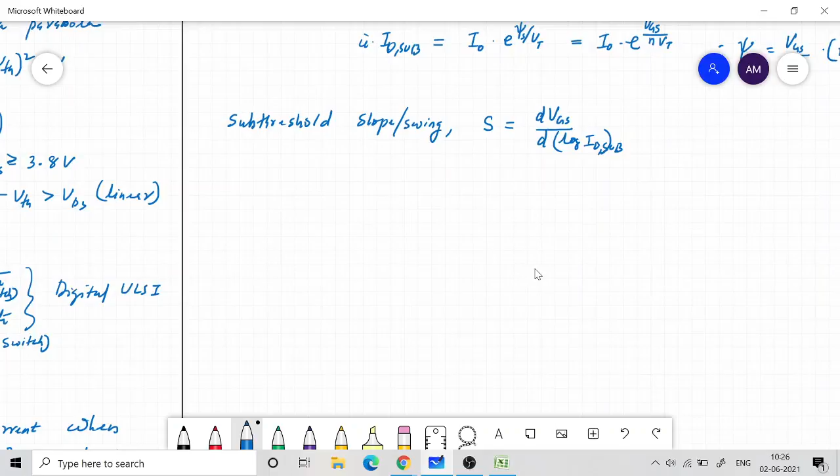So we are defining the slope like this: rate of change of VGS with respect to the change in ID. It's basically the inverse of the slope, you can say. So if it is inverse of the slope, we want this quantity to be as small as possible so that the slope will be maximum. Sudden change is what is required, so that when you change the voltage, immediately the current will go close to zero, not slowly going to zero, but faster way going to zero.

So in order to evaluate this, first of all we need to take the logarithm of ID sub. So if you take the logarithm, what will happen? You will have log I naught, which is a constant, plus we have VGS by NVT, and this is basically a logarithm with respect to base 10. So we will have a factor like this, log 10 to the base e. Either you multiply it with log e to the base 10, or you divide it by log 10 to the base e. So this is what it is.

And now we need to take the derivative. So I will take a derivative of this, ID sub with respect to dVGS. So then what will happen? The constant will go away. So I will have 1 by NVT log 10 to the base e.

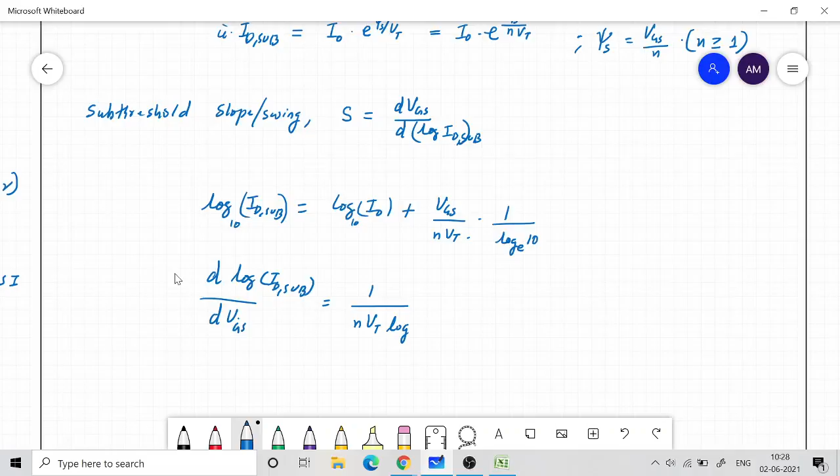Or in other words, according to my definition, S is basically the inverse of this. S is basically, therefore, the subthreshold slope. So that is going to be NVT log to the base, logarithm of 10 to the base e, and that is going to be basically 2.303.

Okay, and VT you know already, that is 26 millivolt. So what is going to happen is that this is going to be N into 60 millivolt. That's what you will get. And what's going to be the unit? So unit, if you look at it, is dVGS by logarithm of ID. So this is per decade, because of the logarithm with respect to 10. That means, what does that mean? For a change of 1 decade of current, it requires 60 millivolt, multiplied by N.

So if N is equal to say 1.5, that means your S is basically 90 millivolt per decade.

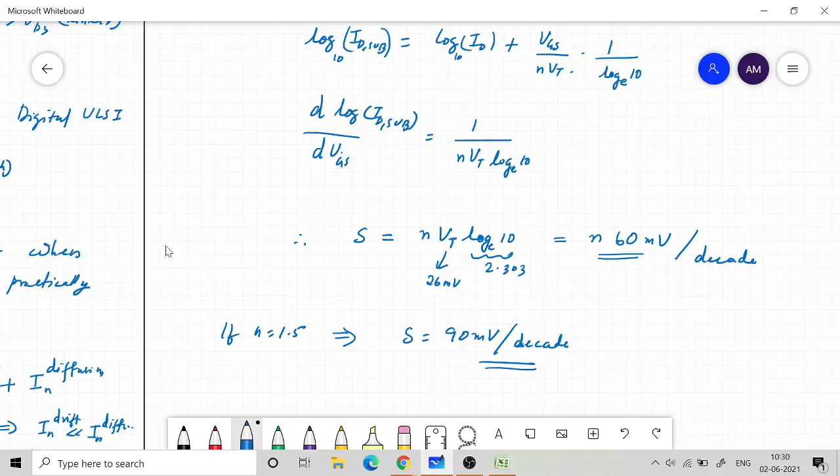So that means, the implication is this: if for example your VTH is equal to 0.6 volt, let's take 0.6 volts. Then at VGS equal to 0, what is going to be my ID?

So it is going to be determined by how many 90 millivolts, okay, and I am taking again N equal to 1.5, so how many 90 millivolts I need to decrease. So that will be 600 divided by 90, that is 60 by 9, that is around, so 63 divided by 9 is around, so it's around 7. So that means 7 orders of magnitude I am going to reduce the current.

So that means if ID for VGS above VTH, suppose if this is equal to say 10 milliampere, then when I make VGS equal to 0, or let us say this is VGS equal to VTH, it is 10 milliampere, and when VGS is made to 0, it will change by 7 decades. That means 10 raised to minus 7 multiplying 10 milliampere, this many amperes. So that is how much? 10 raised to minus 9 ampere or nanoampere. So this is going to be 1 nanoampere. So that is how the current is going to change when I make this.

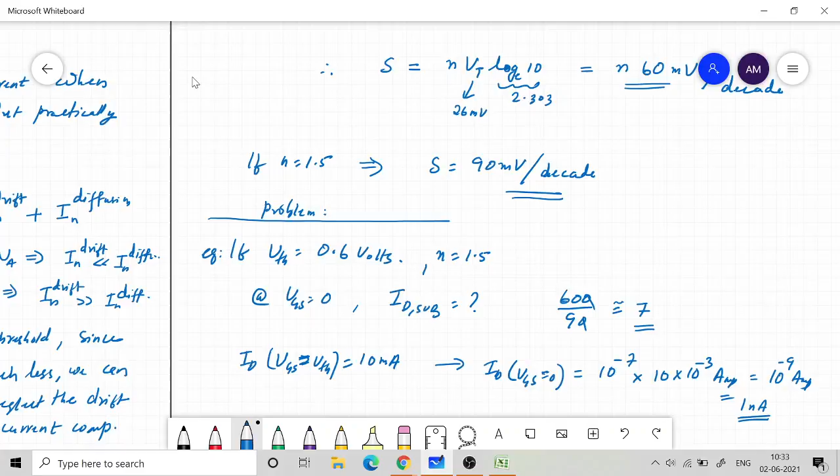When you switch off the device, by giving a 0 voltage at the gate, you will have 10 raised to minus 7 multiplied by whatever current which was there when you turn on the device. So it will be 1 nanoampere. So one thing you can see is that if the threshold voltage is larger, the off current or the subthreshold current when you make VGS equal to 0 is going to be very small.

But on the other hand, if you redo this problem with say VTH equal to 0.27 volt, if threshold voltage is 0.27 volt, so 270 divided by 90 is going to be just 3 orders of magnitude it will reduce. That means if it was 10 milliampere, it will become 10 microampere, which is very significant. So for small threshold voltage, the off current is going to be much more significant, but for large threshold voltage, the off current is really negligible because there is a lot of decades of reduction that is possible there.

But on the other hand, when you make the device small, your power supply voltage is something like 0.8 volt these days. So you cannot have a large threshold voltage. Threshold voltage will be kept something like say 0.2 or 0.3. So you cannot have that at high voltage. Otherwise, there is no space for accommodating voltage change, in the aspect of noise in the circuit. So we need to have some gap available. So therefore we cannot really keep the threshold voltage very high when you scale the device to very smaller dimension.

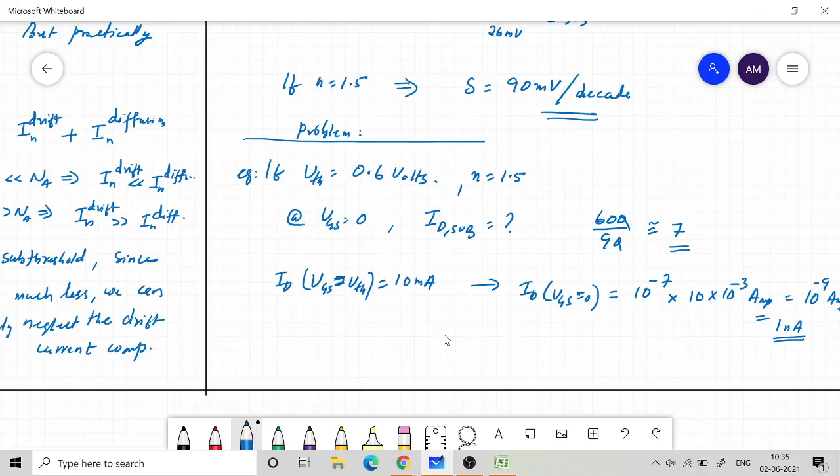So that is a challenge. So there's a trade-off: as you increase the threshold voltage, we can have a large change, or we can make the off current really small, but then the scaling will prohibit us from keeping the threshold voltage very large. So there is somewhere a trade-off that we need to keep.